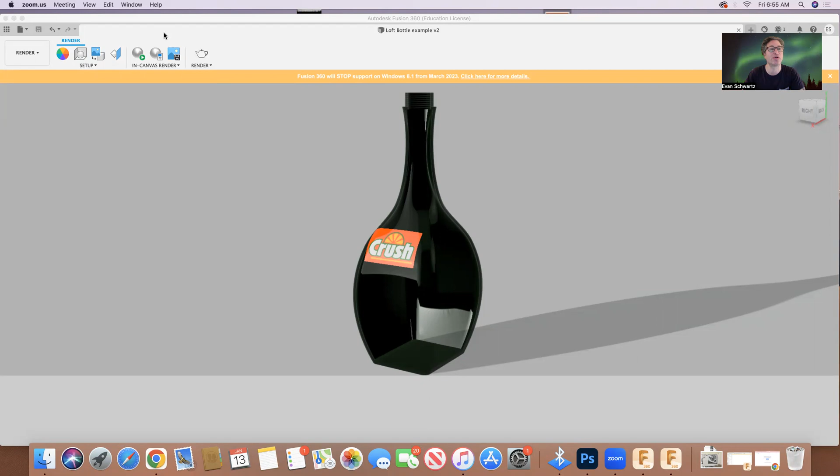So I'm going to teach you by showing you how to make this bottle. You're then going to use those skills to make your own. Okay, so let's get started.

So we're going to start a new design. For this one, when we start our sketch, I'm going to start from the top view like this. We're going to use a particular type of rectangle, the center rectangle. We're going to start at our origin point and put it out. The foundation or base is going to be smaller, so the height is 2.5 and the length is going to be 3.

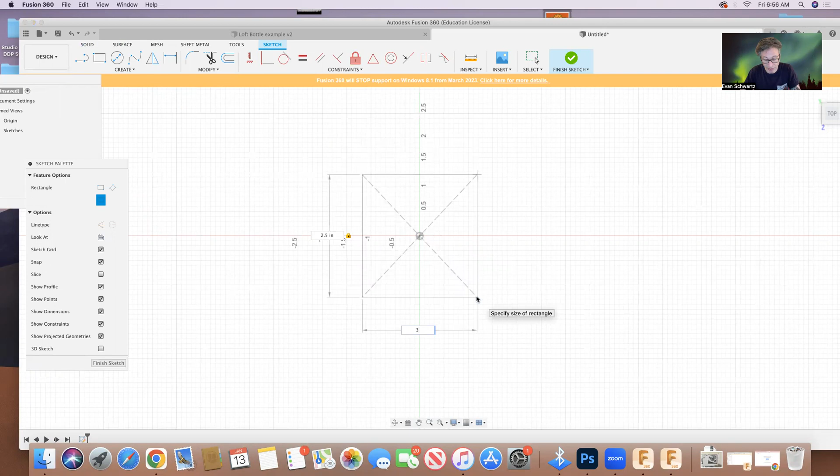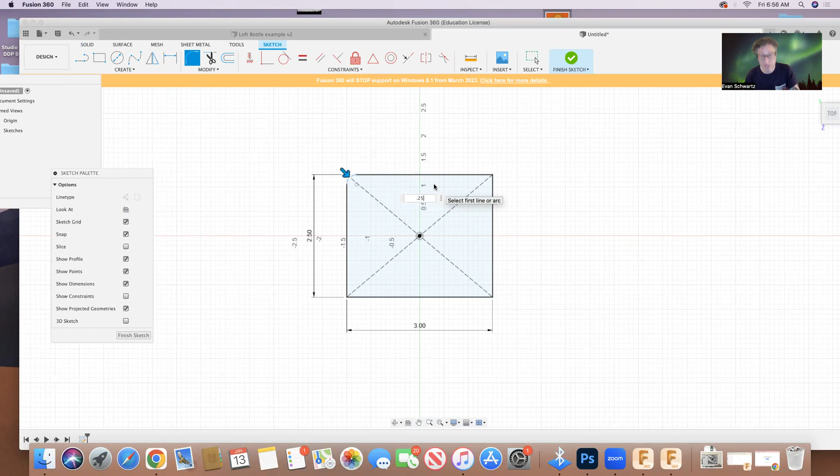We're going to set that. Now I'll click off my constraints and leave everything else for now. We're going to fillet the corners by selecting two sides, and we're going to do 0.25. Once we set one, it's set for the others that we do, so we just have to select the sides we want.

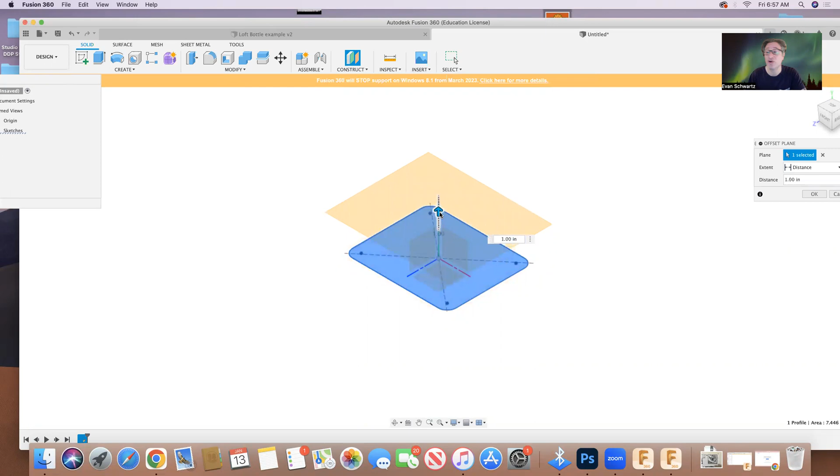Okay, and that's done. Once we do this, we're going to finish our sketch, go to construct, offset plane, choose the shape, and we're going to bring this offset plane up 4.5 inches. We can put 4.5 in our field, hit enter to set it, and zoom out a little bit here with our mouse.

Okay, so we're going to create a sketch on this work plane, and we're now going to do the same thing but slightly bigger. We're going to be doing a lot of repetition: first two rectangles, then two circles. So let's go to our center rectangle.

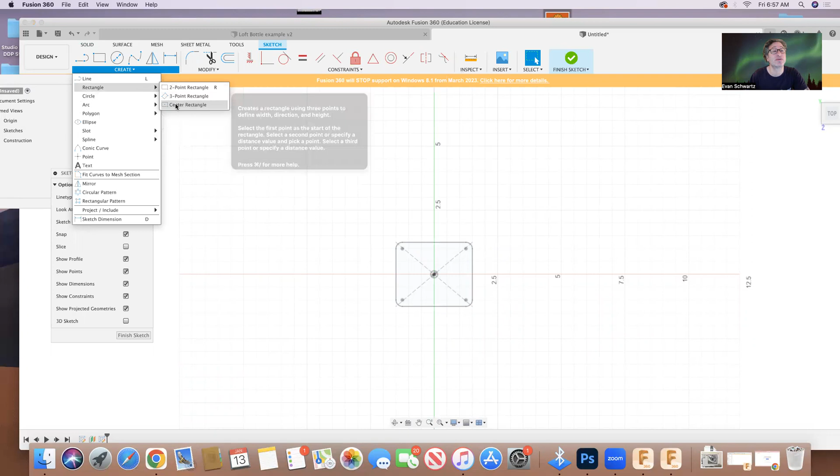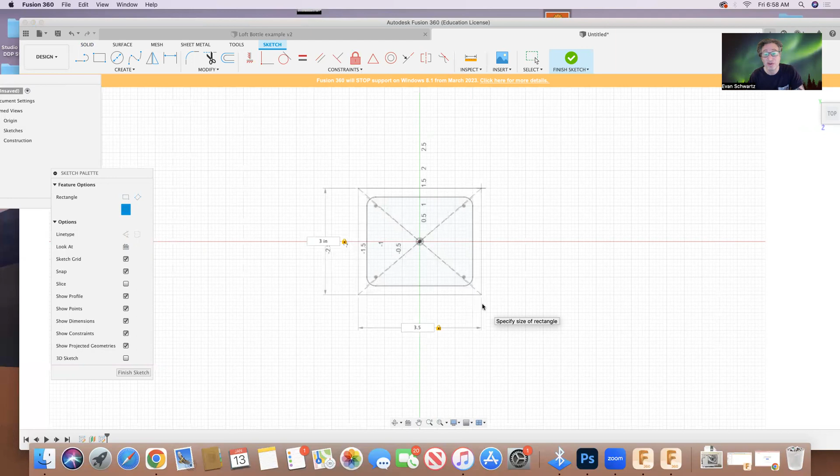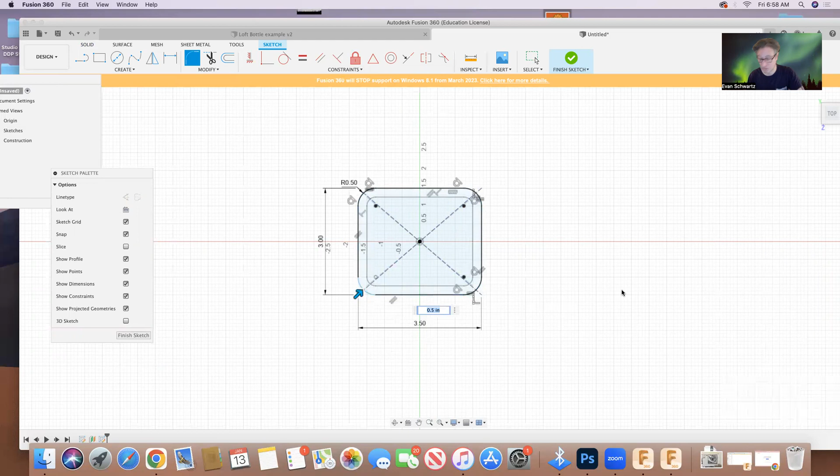We're going to center my drawing, going from the origin point again. This one is going to be slightly larger, so the height is going to be 3 and the length is going to be 3.5. We're going to set that, and fillet these again, but this time it's going to be 0.5, half an inch.

Okay, we're going to set that. And this is what we have so far. I'm going to click off my constraints so it's not so messy.

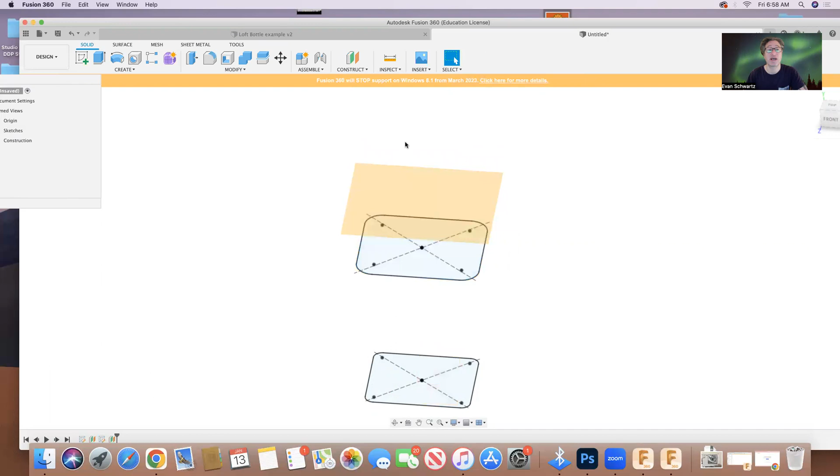Now we're just going to do the same thing where we finish the sketch and do an offset plane off this one. We're going to raise this 1.5 inches. Hit that, sketch on the work plane.

And this time we're going to do a circle that is 1.75. We're going to finish the sketch.

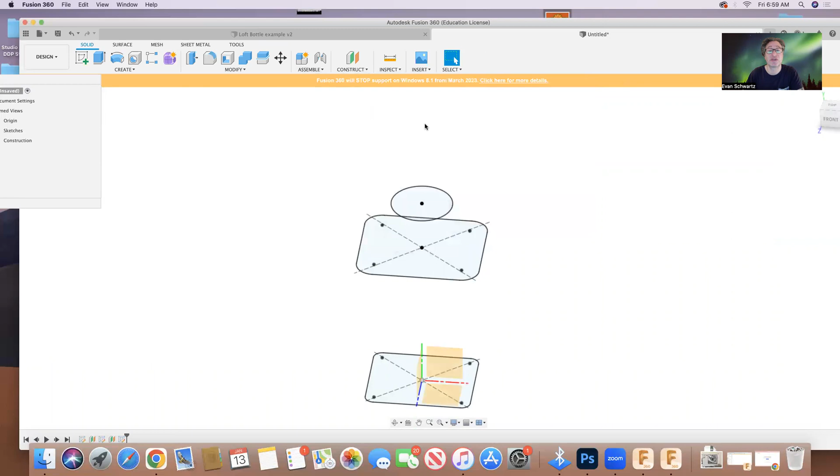Offset plane. We're going to bring this up 3.5 inches. And this time, this one is going to be 1.25, 2.5. Okay, we're going to finish the sketch.

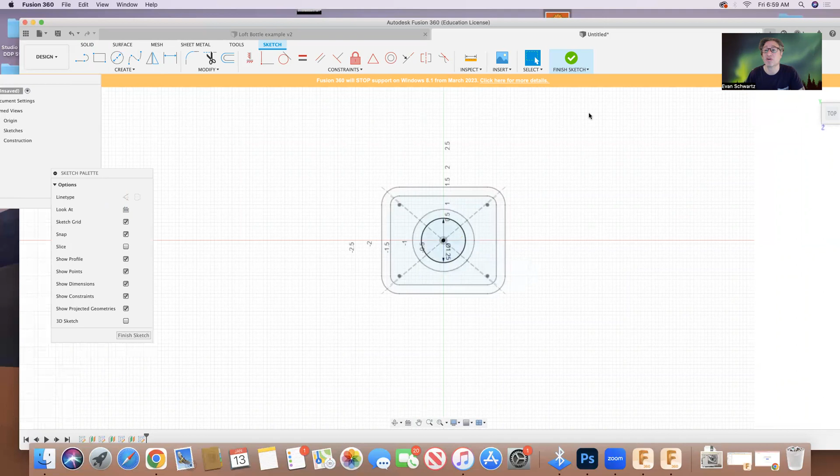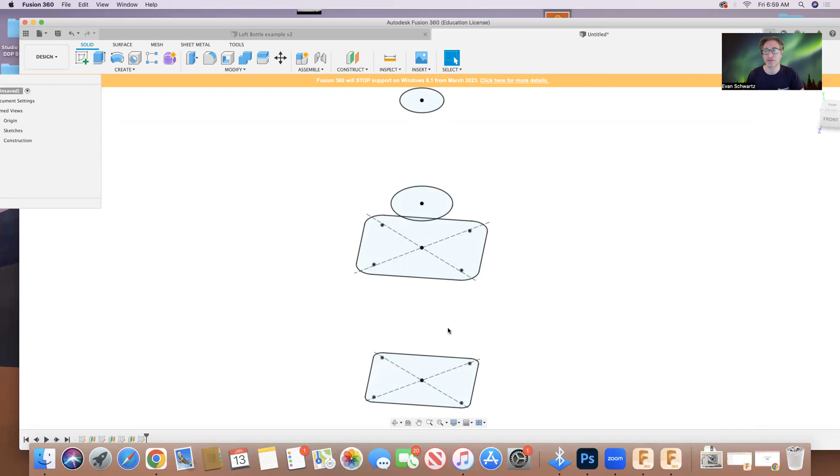Now what we're going to do - we have all the things we need to loft except for a profile line. So in order to do this, we're going to be creating a sketch, but we need to first select the work plane that we're going to be sketching off of.

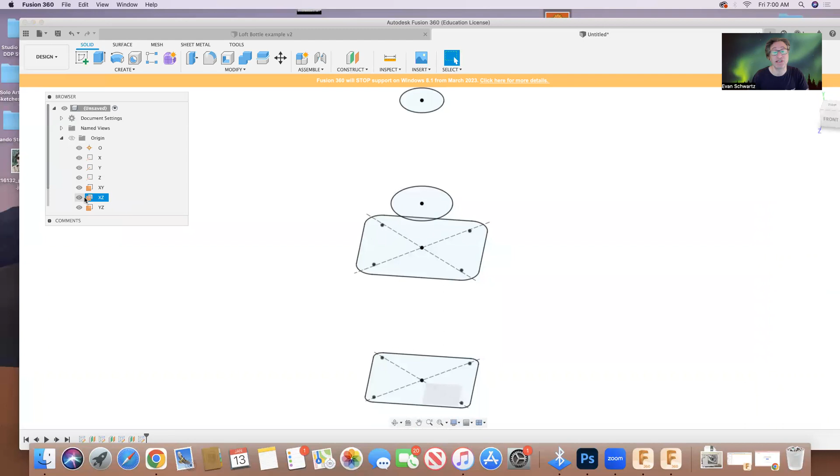So to do this, we go to our origin in our browser, okay? And there's XY, there's XZ, and there's YZ. So you should be seeing these rectangular planes pop up. So the one that we want is the one that is parallel to the length side, the long side, that's standing up, and we're just going to select that so it's visible.

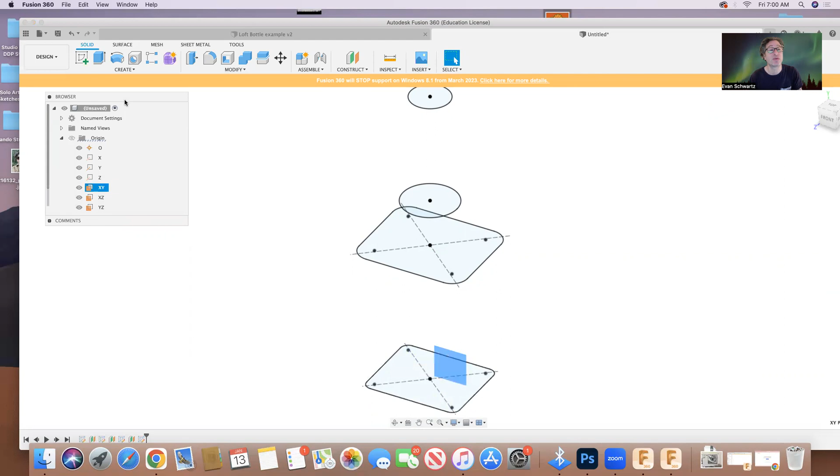And we're going to hit our create sketch button, and it's automatically going to go to that view so we can sketch on that view. So what we're going to do now is go to our fit point spline, and we're going to connect it to the line. Make sure it's on the line.

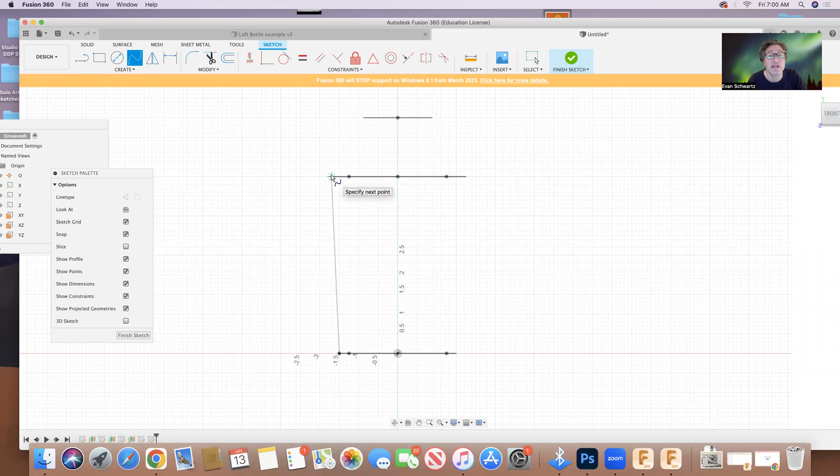We can examine this more closely after we draw it. But it's still nice to know what you're doing.

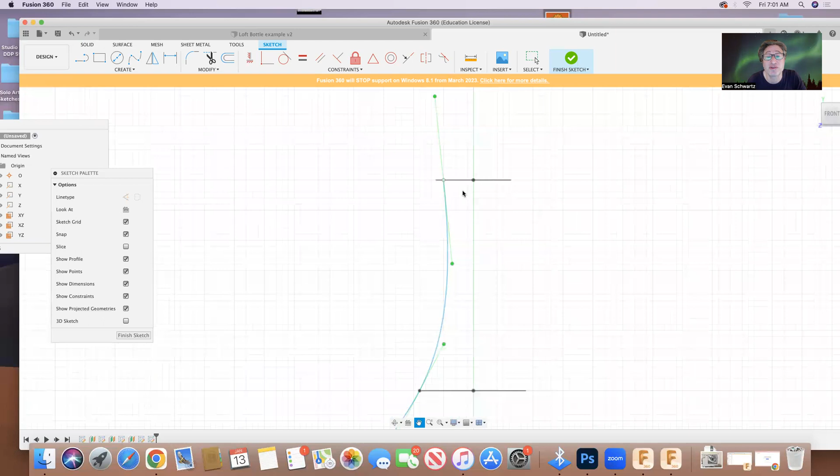So this is where we go in and kind of take a look at it. We want to make sure the dots here are lined up to the line, so we want to move this over. Let's go way in there. Okay, great.

Let's give the same detail to all of these. I think this could be just... and yeah, so you want to get really up in there.

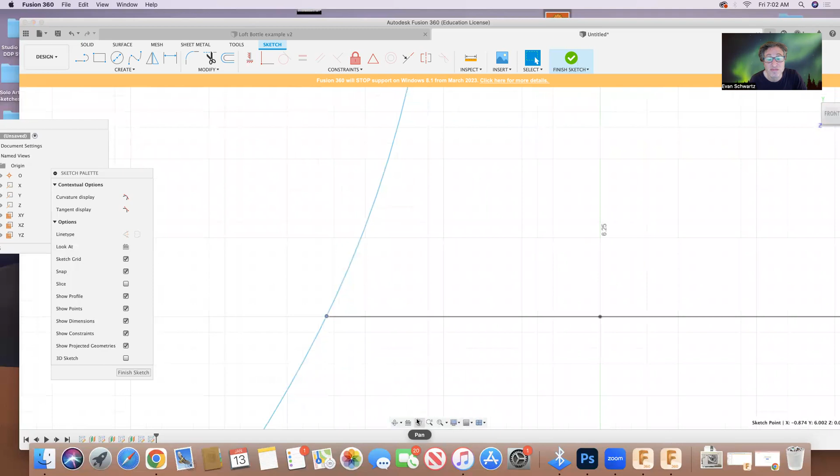Okay, that looks good. So we're going to zoom out. We have that profile. So what we can do now - this is the fun stage.

We can use these anchors to change the shape of it. This anchor line here is, I think, the most useful, because you can get it to change the body in the most dramatic way. So if we were making our own body, which you will be, you can use some of these to manipulate the bottle in unique ways.

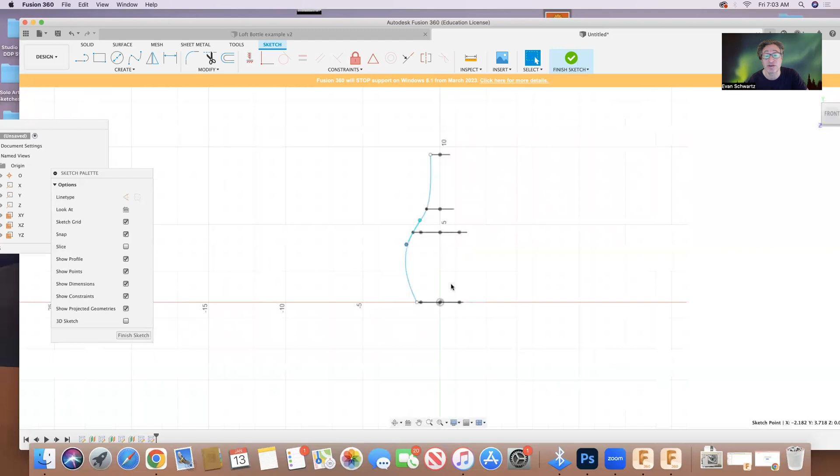So we're just going to leave it as it is for now, okay? Let's take a look at what we have. Is everything still connected? It looks good.

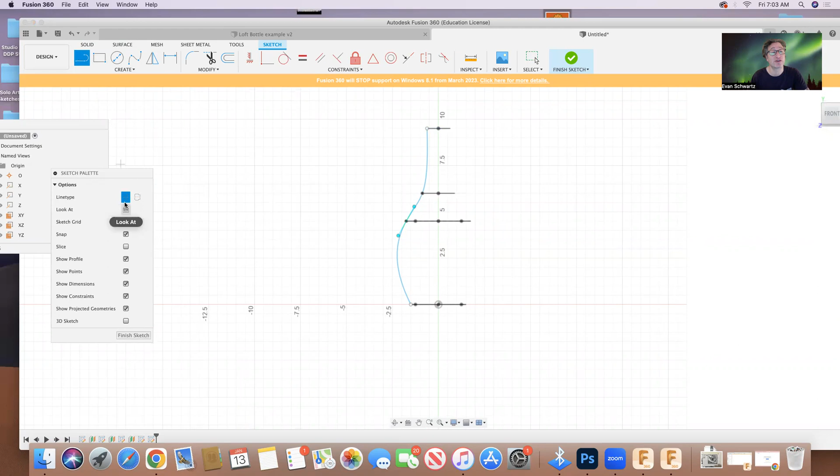Now what we're going to do is mirror one side to the other. I'm going to do a construction line, because we do not want it to be part of our form. We're going to go from the origin up, and you can give it any length whatsoever.

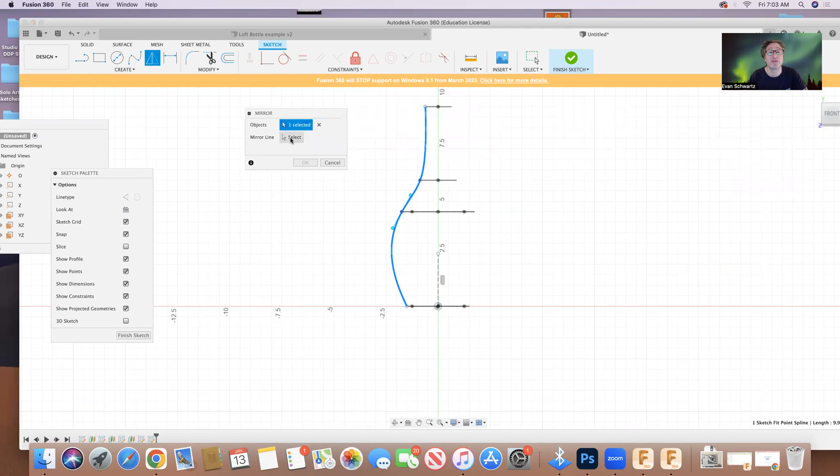I'm now going to go to my mirror, select the line. It's going to ask that you select the mirror line. Okay, there we go, we're going to set that. We can then select that construction line.

And this is where the fun begins. Okay, so we have our profiles and we have our rail profiles as well. So we're now going to go to create.

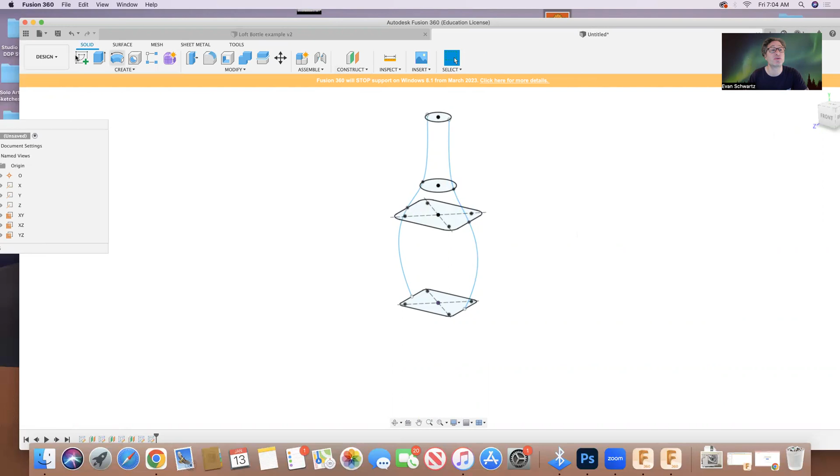Loft. I'm going to start from the bottom, top. All right, and there we have it. So we're going to hit OK. Now we have this here.

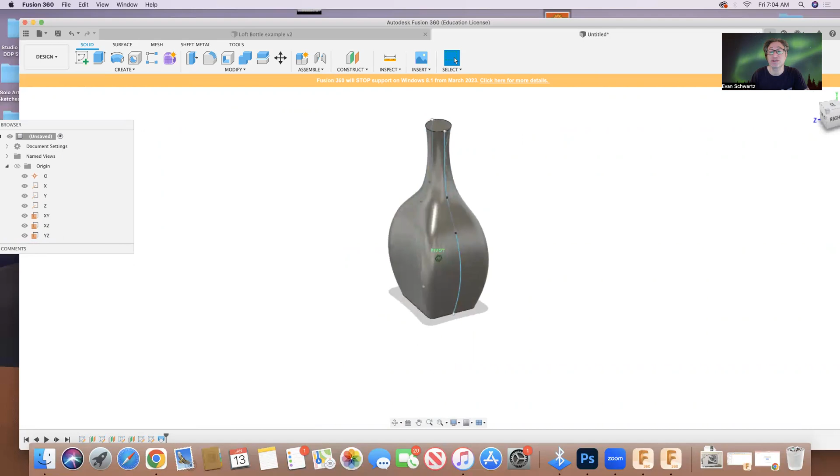Okay, so we can get rid of the sketches, but in the meantime we need to keep building off of this. So we're going to build a lip to it, that is where the cap goes on. So we're going to create a new sketch on the lid, okay?

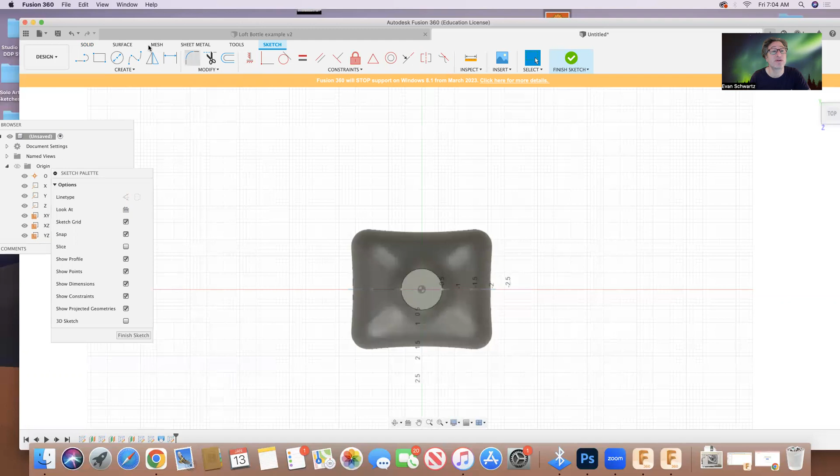And we're going to do another circle here. This is going to be 1 inch. We're going to set that, finish our sketch.

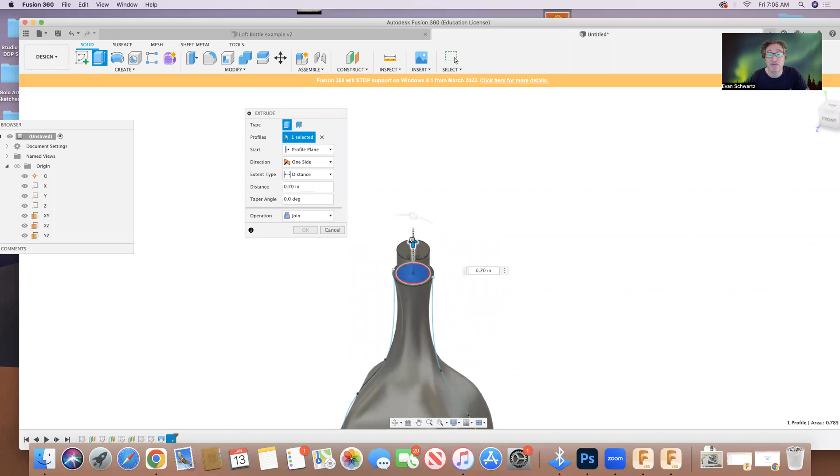We're now going to extrude this upwards 1/2 inch. Oops, let's do 0.5. Okay, good, zoom in there.

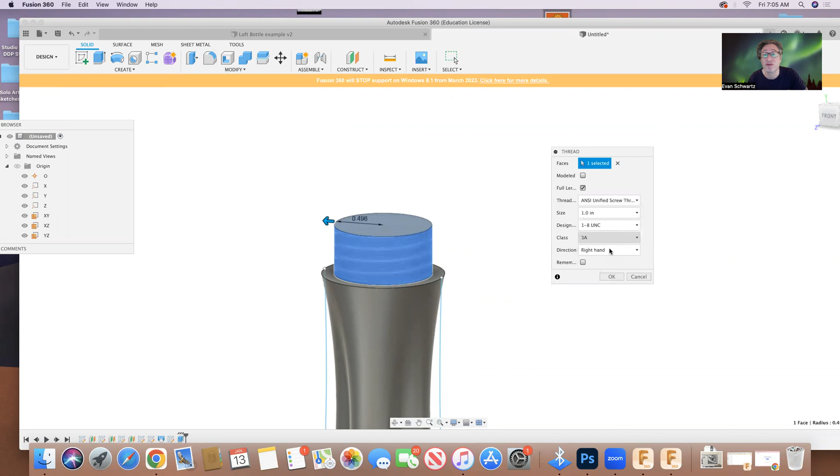Now what we're going to do is go to create thread, and we're going to add threading to it. Now there's a whole bunch of threading, there's all of these here. Some are smaller and some are wider, whatever fits your fancy. Okay, so we'll choose one of these.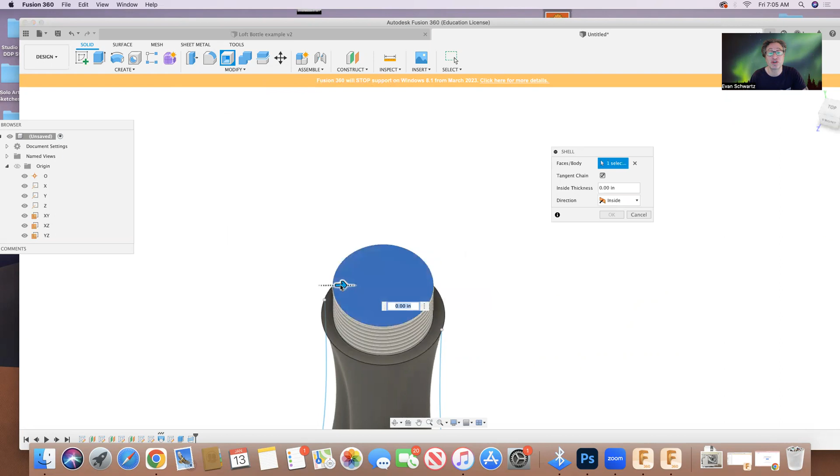We're now going to hollow out the bottle, so we're going to go to our shell, this would be right here. And we're going to select the top here. This should go in 0.10, I think that's good, like this.

All right, we're almost done. So at this point, I'm going to go to fit. Going to find my sketches, click off them. All right, and we just have our bottle here.

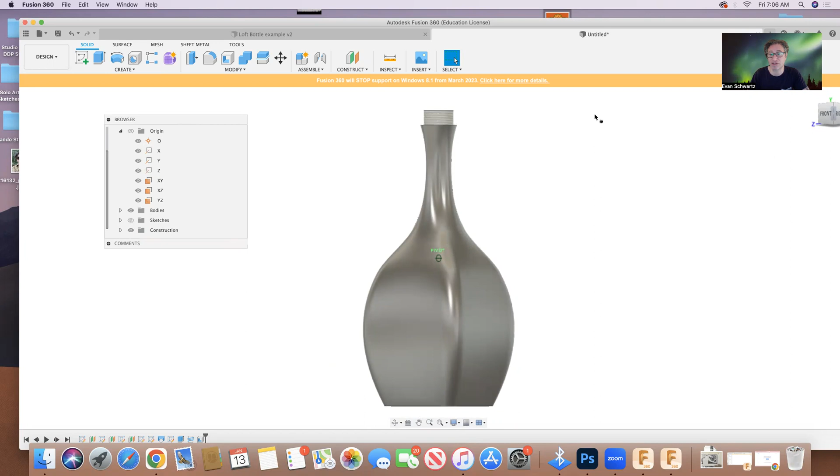We're at the last stage here. We're going to go to—oh, I forgot to do one last thing. We're going to fillet the bottom. I think we have, okay, yeah, I wanted 0.25.

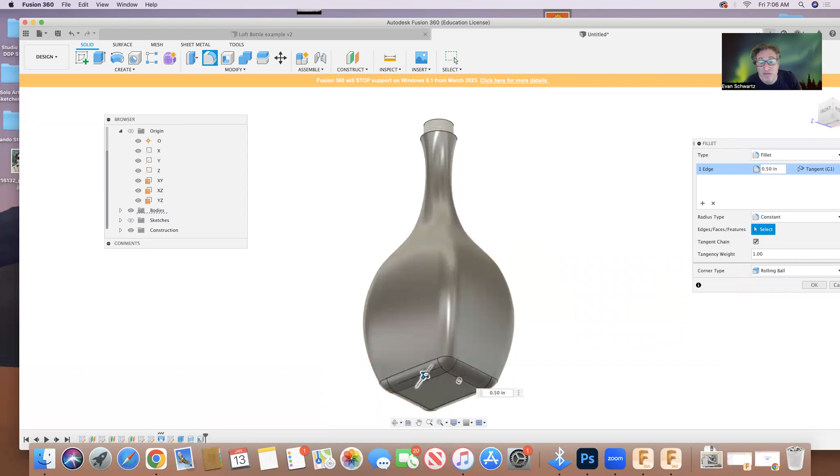Let me zoom in. Yeah, we'll do just a little bit. I guess it's not allowing me. I'll do 0.20, okay, all right, cool. So we want to round that out.

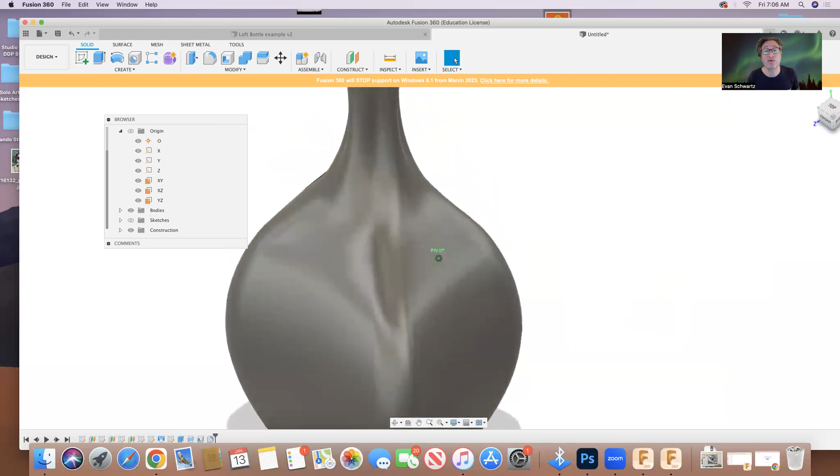Everything else is fine, okay, so we're going to go to our render right here. Let's zoom out a bit. All right, actually, let's go back into design.

Missing a few steps here. Let's go to physical material. And here is where we can assign the material. So I'm going to do glass here.

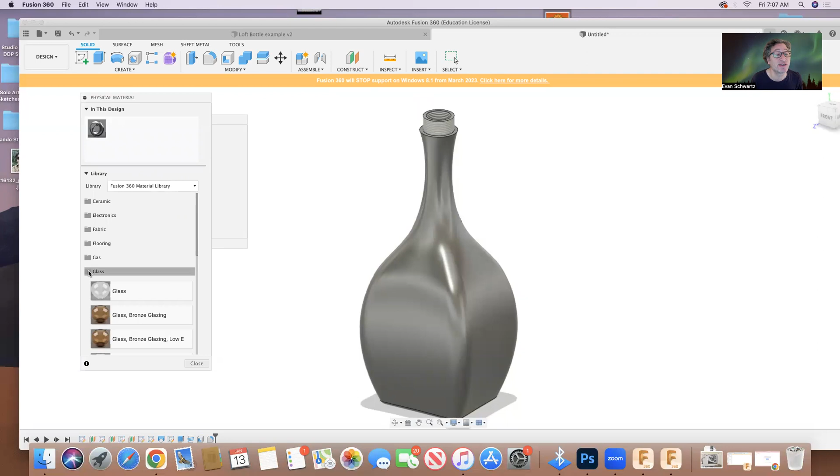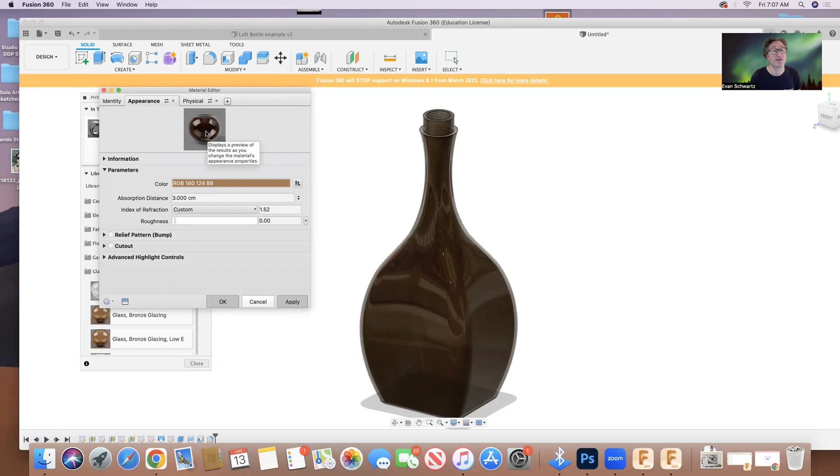I chose a colored glass, but I'm going to change it. So I'm going to add that to it. But now that it's in the design, I'll click on it, go to advanced. Okay, and see appearance, double click on the icon, or just click on here.

And this wheel will come up, and I want something in the green category, and this can make it either lighter or darker. I want a dark green. I'm going to hit OK, and now we have this dark green glass.

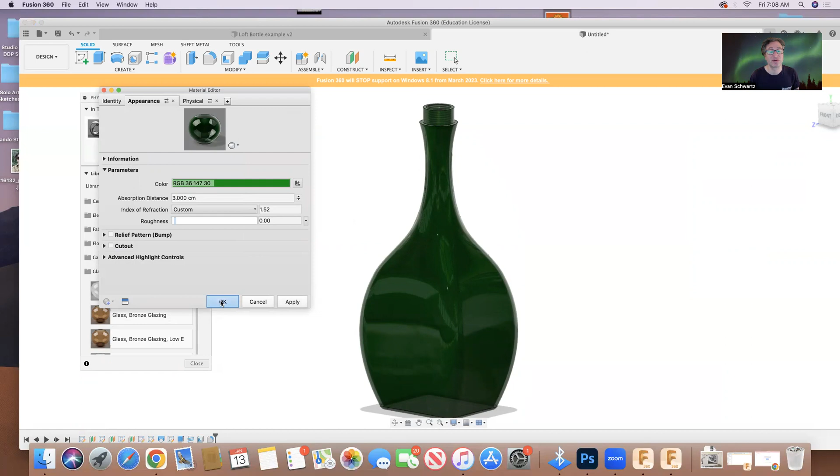So this is how you can customize the color. Okay, and I'm going to hit OK, close. Okay, now I'm ready to go into my render phase.

I'm going to now add a decal. Now, the way that you can add a decal is by going to Google Images. You can put whatever beverage you want in logos, and a whole bunch of stuff will come up.

You can then drag it to the desktop, most likely, and rename it as something like whatever it is. And then you'll be able to add it. So let's go back to our Fusion.

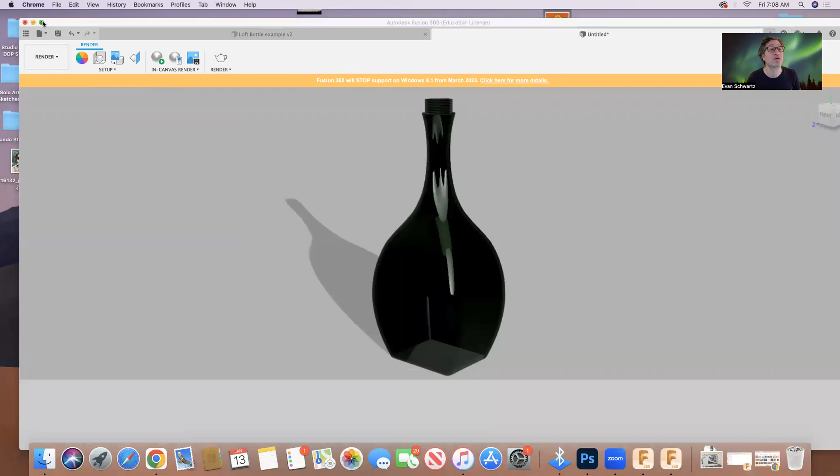And we're going to go to our decal button, and it's as simple as insert. I was bad, I didn't label mine, but I know where it is. Okay, let me choose where I want it.

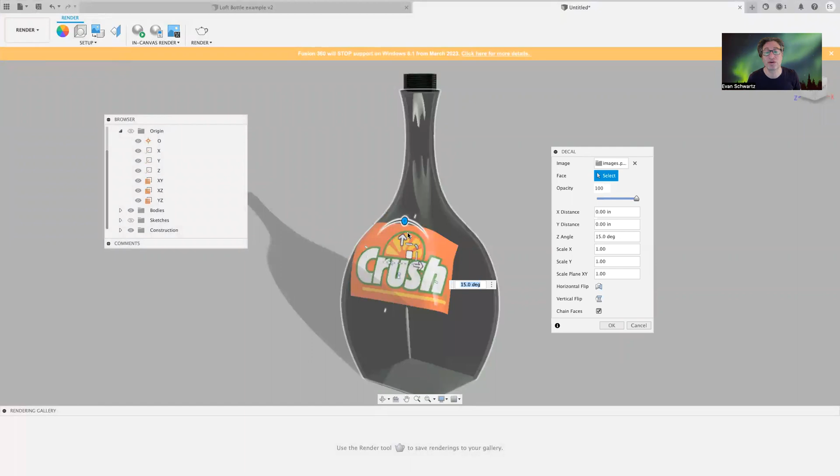This will allow me to orientate it, to move it. Okay, but let's get a front view of it.

And this will allow me to play with the size. And you also have the degree here. So if you want it to be 15 in that direction, you could always do that, or you could do negative as well to go in the other direction.

Okay, let's just say this looks good. All right, and here we are. Let me get that fit. There we go, and we have our bottle here.

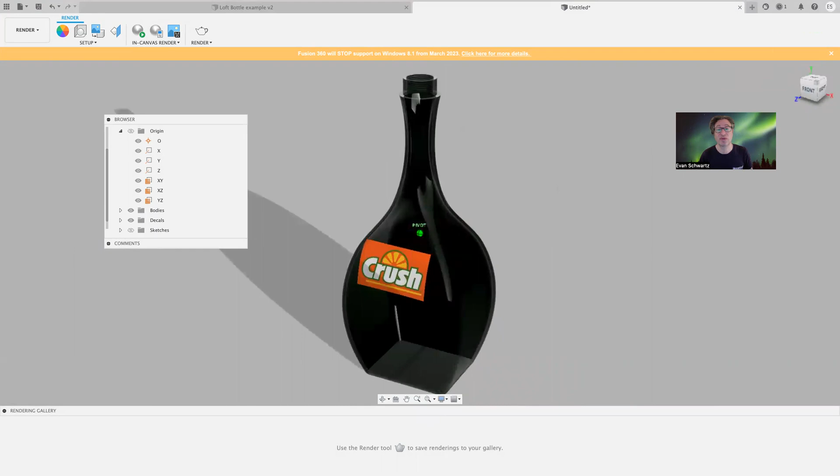Okay, maybe put a label on two sides. Okay, so for the next assignment, you're going to use similar tactics to design and make a bottle that looks drastically different with a different label, and you can even do a different material like plastic or something like that.